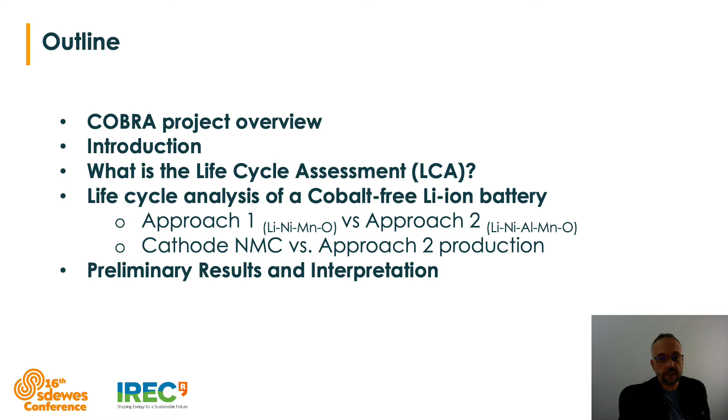Cobra is a European project whose objective is to develop a novel cobalt-free lithium-ion battery technology in order to overcome many of the challenges faced by electrical vehicle batteries, enhancing each component in the battery system in a holistic manner.

Basically, the chemistry of this battery consists of a lithium nickel manganese oxide cathode in combination with a composite anode based on nanometer silicon and graphite as active particles.

This project is financed by the European Commission under the program Horizon 2020. The project started last year and it is expected to finish in 2023. Basically, the scope of the project is to develop the battery pack in order to be validated on automotive electrical vehicle testing.

This is the consortium of the project. As you can see here, we have several companies: industrial engineering and research technology organizations, academic sector, and battery manufacturers. All of this consortium is involved across different European countries.

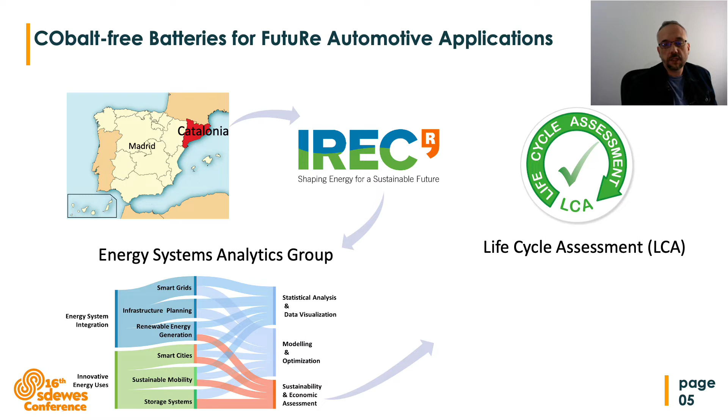From IREC, in particular from the Energy System Analytics Group, we are involved in the project in order to calculate the environmental impacts related to the solutions of the project, using the life cycle assessment methodology to provide guidelines for eco-design aligned with circular economy strategies.

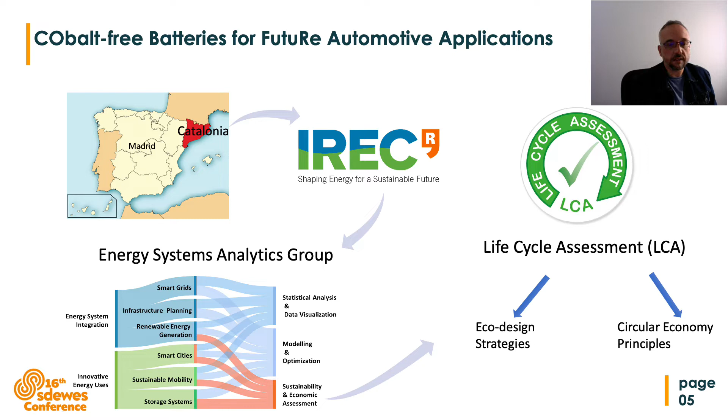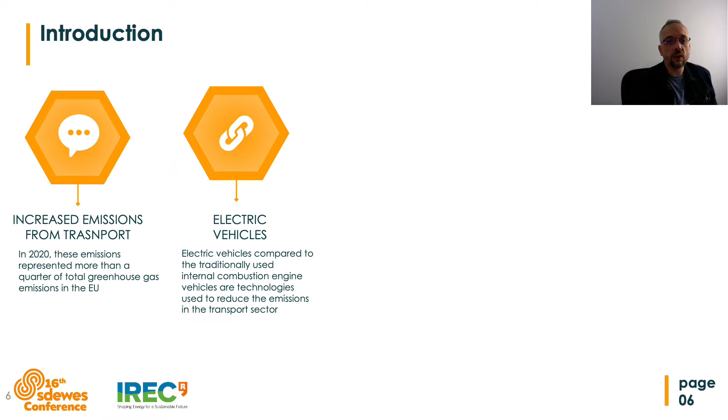Well, as you know, the transportation sector has increased their emissions, and in 2020 these emissions represented more than a quarter of the total greenhouse gas emissions in the European Union. This is why electric vehicles are the main technology in the transportation sector in order to reduce these emissions.

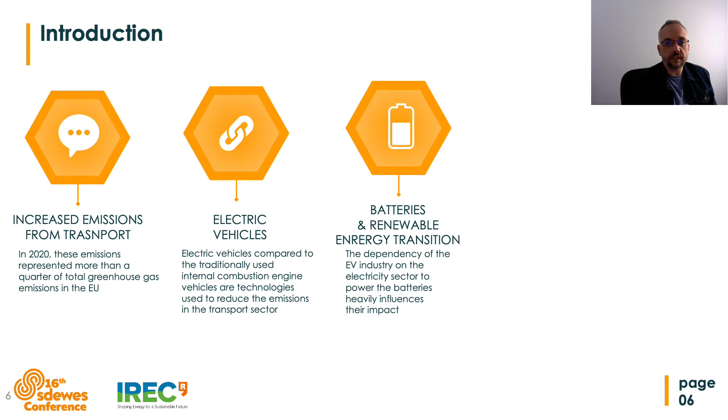The batteries are the main core of this technology, and these batteries have an important role in the renewable energy transition.

The lithium-ion battery technology implies using different raw materials such as lithium, cobalt, nickel, manganese, and graphite, most of which are categorized as critical materials. These materials can bring environmental impact throughout the battery supply chain.

This is why it is very important to address the entire life cycle in order to be able to assess the sustainability of the electrical vehicles.

Regarding our findings in the literature and studies, we can see that lithium, manganese, nickel, and natural graphite have moderate reserves to cover the expected 10% share of electric vehicles in the global fleet in the next year. However, these reserves are not enough to cover the expected increase in demand.

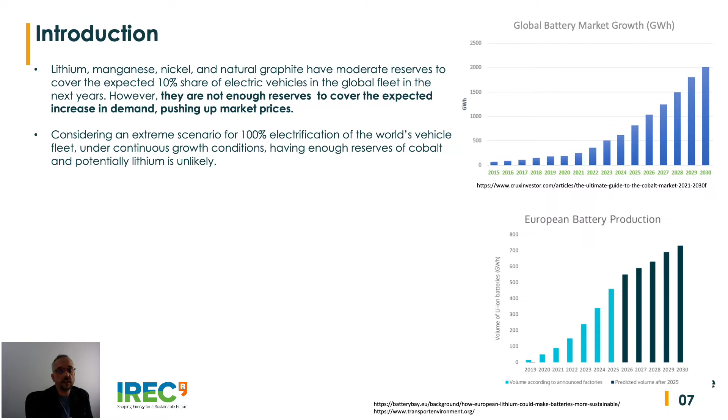On the other hand, if we consider an extreme scenario for 100% electrification of the world's vehicle fleet under continuous growth conditions, having enough reserves of cobalt and potentially lithium is unlikely.

In addition, according to our previous studies and literature, we have found that cobalt and nickel, for example, increase significantly the environmental footprint of lithium-ion batteries.

On the other hand, cobalt is extracted mainly from the Democratic Republic of the Congo, a region historically characterized by political instability and social impacts in the mining sector, involving issues related to child labor, unsafe mining conditions, illegal extractions, and uncountable deaths.

The life cycle assessment methodology allows us to quantify the impact of a product throughout its life cycle, including raw material extraction, manufacturing, use, and end of life.

We can focus the life cycle assessment study on three different scopes, for example, from cradle to grave, cradle to gate, and gate to gate. We can also include an additional scope, which is gate to end of life.

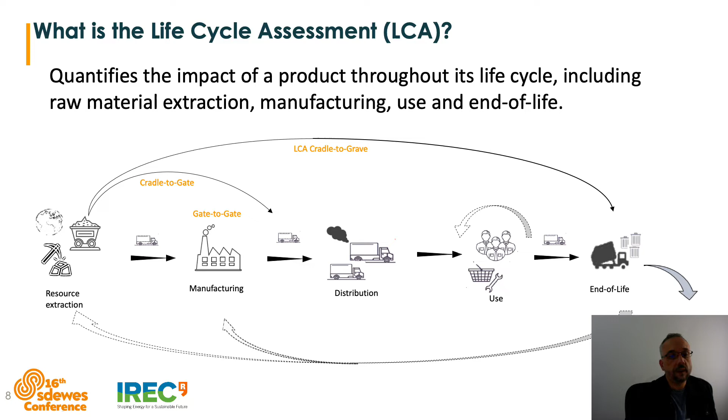This methodology comes from the philosophical concept named life cycle thinking, but it was the standards, the ISO 14040 and 14044, which establish the guidelines in order to calculate the life cycle impact of a product. In these standards, we have 4 phases in order to complete the analysis.

The first step is to define the goal and the scope. Then we have to make the inventory analysis in terms of the materials and energy inputs and outputs. And then we have to convert this inventory into environmental impacts using different methods and different environmental metrics in order to obtain the results, which we will use for the interpretation in the last stage of this methodology.

These stages are very iterative between them. We come back to other stages depending on the redefining of the goal or the scope, or maybe we have to detect some improvement in the inventory, or maybe it is necessary to update the databases in the impact assessments. But at the end, we need to have the final results in order to provide the conclusions and recommendations.

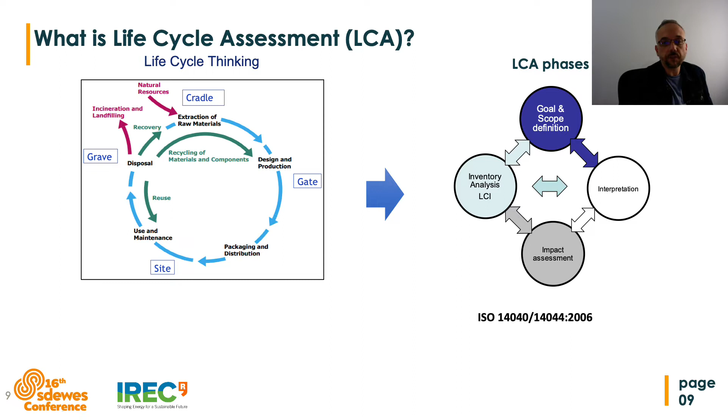This methodology allows us to inform decisions and policies in order to reduce the life cycle impact of the product. And this methodology can support product development and improvement in a company, to make strategic planning, collaborate with public policy making, marketing, benchmarking, and this methodology is used in order to report eco labels and product declarations.

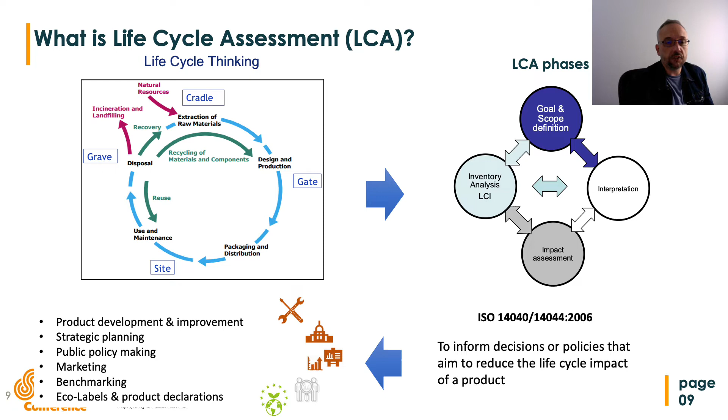We'll start with this explanation of the study. The goal and scope was defined as to explore the environmental impacts related to the production of cobalt-free lithium-ion pouch cells in its early research stage. This preliminary study will be useful to develop the battery pack in the future for the vehicle.

The study is focused on two cathode approaches, as mentioned before. Approach 1 is based on the lithium nickel manganese oxide, and approach 2 is based on the aluminum doped oxide, similar to approach 1, but the powder is doped with aluminum.

This is the system boundaries, and you can see in this slide we have made the study from the raw material extractions and the component production, including the cathode, anode, electrolyte, and separator, and the cell production. The other stages belonging to the life cycle of the battery were not included in this study, and the functional unit is defined as one pouch cell produced.

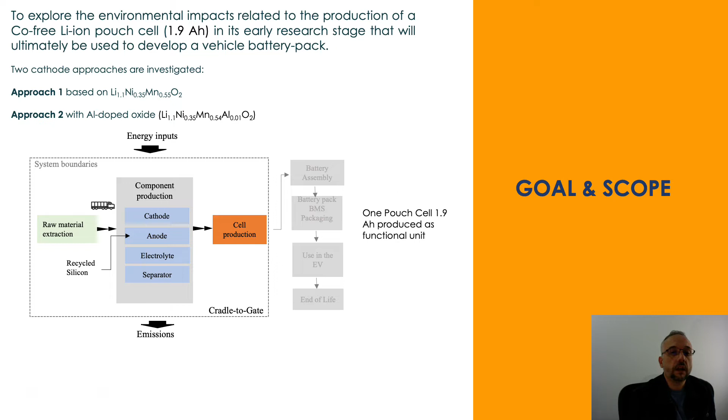On the other hand, as mentioned before, we made a preliminary study about the comparison between the commercial nickel manganese cobalt cathode compared to cathode approach 2. For this specific study, we have defined the functional unit as 1 kilogram of powder.

You can see in this slide the life cycle inventory. In this table, we can find the different materials used to produce the cathode, the anode, the electrolyte, and separator. Basically, the difference between approach 1 and approach 2 was the binder used. In approach 1, the binder used was sodium alginate, using water as solvent.

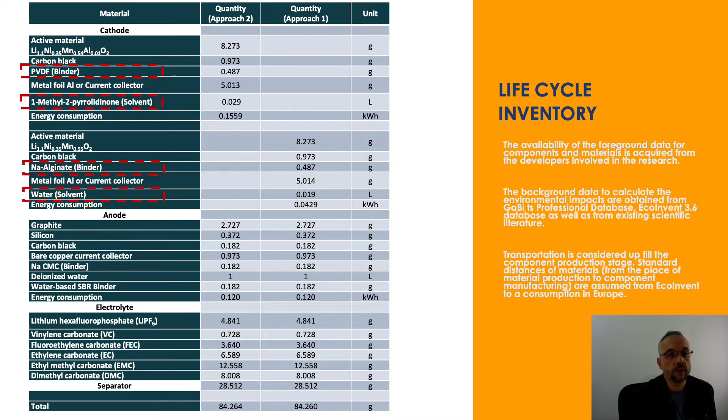For approach 2, the binder is composed of polyvinylidene fluoride, and the solvent used in approach 2 is constituted by methyl pyrrolidinone. These are the main differences between these approaches.

I have to say that the availability of the foreground data for components and materials was obtained from the developers involved in this research. On the other hand, the background data used to calculate the environmental impacts were obtained from GaBi datasets and EcoInvent datasets, as well as from existing scientific literature.

We have included in the model the transportation from the material extraction to the manufacturing, using the standard distance taken from the EcoInvent modeling.

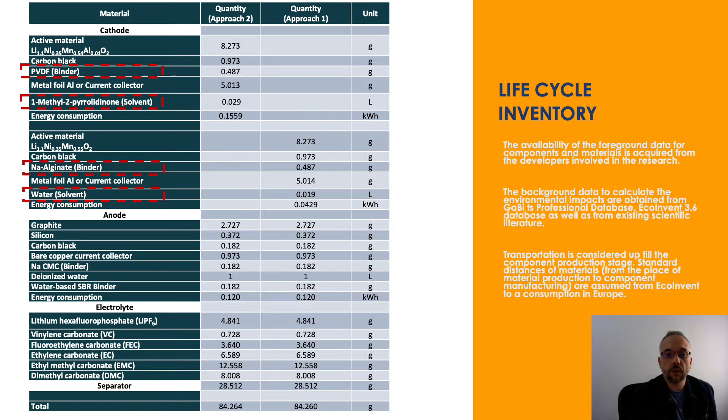So we use the software GaBi in order to calculate these metrics, and the methods used in the environmental impact assessment were the CML method and primary energy demand from renewable and non-renewable sources.

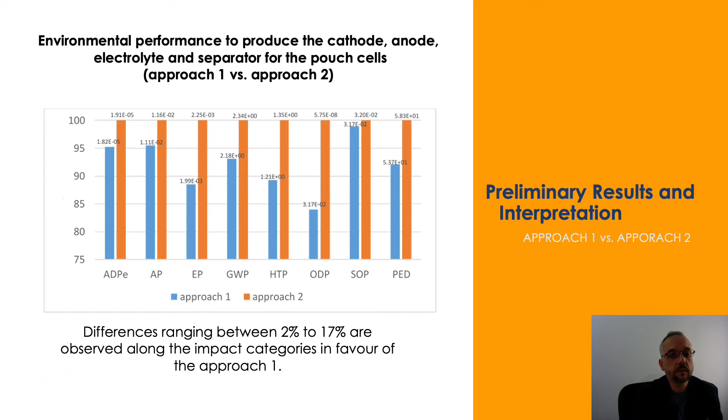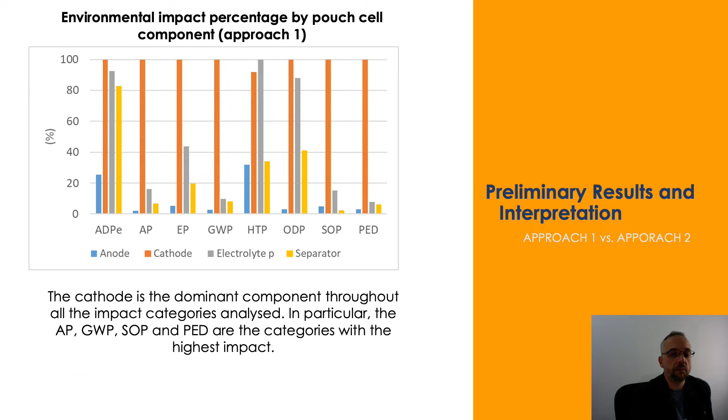If we explore the environmental impact by component, we can see that the cathode is the dominant component throughout the impact categories analysis, as shown in this picture. For example, we can see the acidification potential has a high environmental impact for the cathode. Or for the global warming potential, the cathode also has a high environmental impact, similar for the primary energy demand.

On the other hand, we have the PVDF binder used in approach 2, which has an important contribution of between 12 and 25%, mainly in the ADP elements category, or abiotic depletion potential elements category, in eutrophication potential and human toxicity potential.

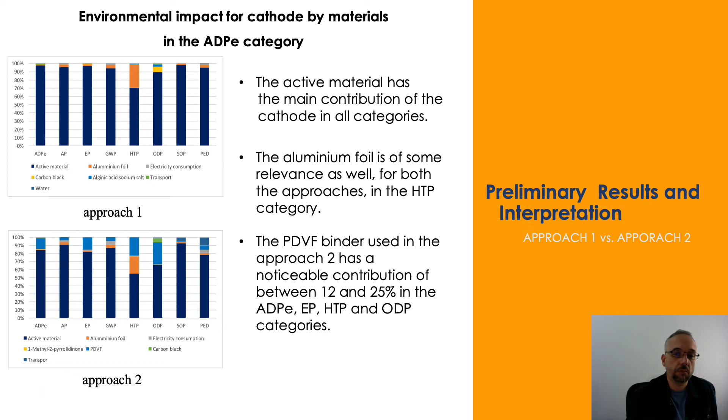If we focus on the abiotic depletion potential elements, we can see that the active material and PVDF binder are the main materials responsible for the higher impact in the cathode approach. It's important to remark that the active material in approach 1 showed a slightly higher contribution, around 0.5%. So the conclusion here is that the binder is responsible for this higher environmental impact in approach 2 compared to approach 1 in this ADP elements category.

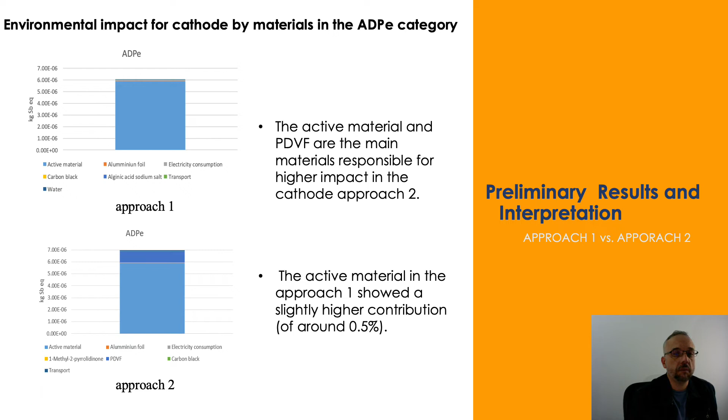If we look at the distribution by materials in the active material production, we can see in this chart that the lithium nitrate and the EDTA are dominant in the abiotic depletion potential elements category, together contributing a little more than 50%. On the other hand, we have the manganese nitrate exhibiting a contribution of roughly 14% for the same category.

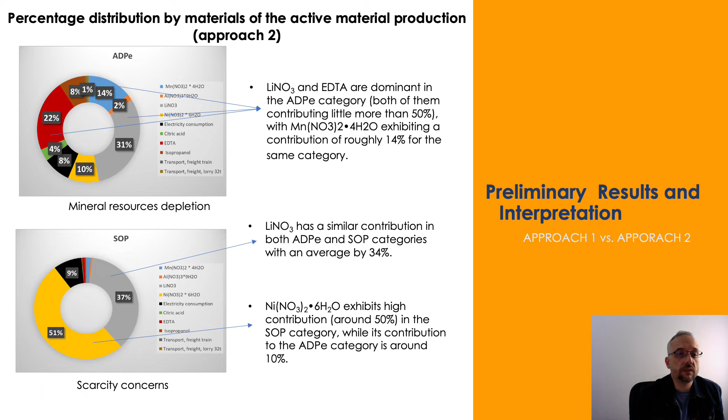This is for the abiotic depletion potential elements category, but in the other environmental category related to resource depletion, the surplus ore potential, lithium nitrate has a similar contribution for both categories. However, nickel nitrate has a higher contribution, around 50%, in the surplus ore potential category, while its contribution in ADP elements is around 10%.

Looking at these two categories related to energy consumption, we can see that both the global warming potential and primary energy demand have important contributions, around 85%. This is contributed largely by the non-renewable resource flows in the PED category, due to the electricity needs assumed in this study.

As mentioned before, the electricity mix used in the LCA study is for the European region, and we can see, for example, for the primary energy demand, the non-renewable resource flows contribute largely to this category, because we have important contributions from lignite, fossil fuels, hard coal, natural gas, and uranium in nuclear energy sources. On the other hand, we have fossil fuels representing around 40% of the electricity mix, contributing largely within the global warming potential category.

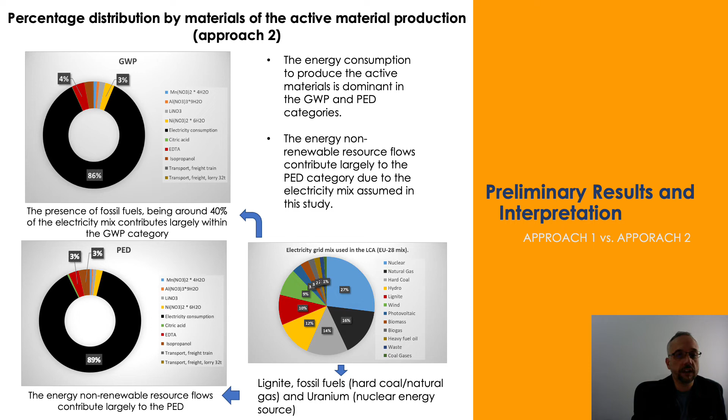For the study of the comparison between the commercial nickel manganese cobalt and approach 2, we can see for these specific environmental categories that the global warming potential and primary energy demand are the categories reflecting the highest impact for approach 2, compared to the nickel manganese cobalt cathode. It can be attributed to the high energy consumed to produce the active material for approach 2.

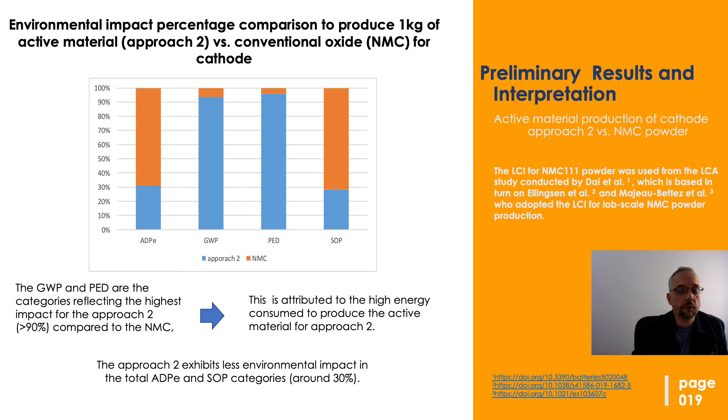Approach 2 shows less environmental impact in the total abiotic depletion potential elements, and the surplus ore potential categories are around 30%.

It is important to remark that the small batches will exhibit higher energy consumption per kilogram of powder, so many steps in powder production happen per batch rather than per kilogram. This implies that energy consumption will go down when the size of the batch is increased, or when the batch production takes place on commercial or industrial scale.

On the other hand, the energy consumption also depends on the calcination temperature of the material.

In this graph, we can see for the category of surplus ore potential that the active material approach 2 has lower environmental impact when compared with the nickel manganese cobalt powder. This is attributed to the higher impact of the hydroxide nickel manganese cobalt as subcomponent to produce this cathode. It is around 87% of the total impact of the nickel manganese cobalt.

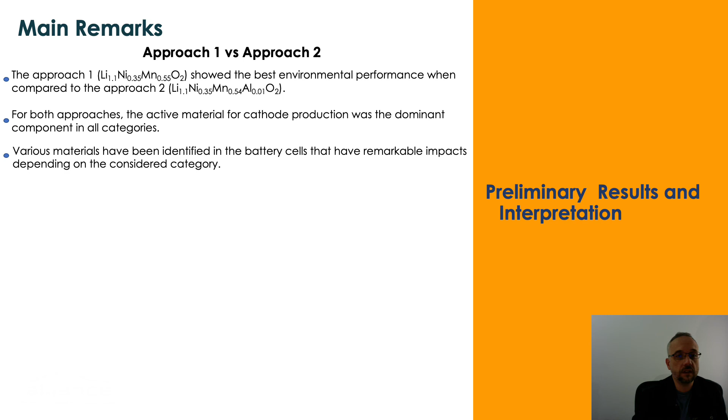In addition, we have detected that several materials identified in the battery cell have remarkable impacts depending on the considered category. The energy consumption to produce the active material is dominant when focusing on the global warming potential and primary energy demand categories, which is due to the presence of energy resources in the electricity mix of the European region.

For the approach comparison with the commercial nickel manganese cobalt powder production, we found that active material approach 2 has lower environmental impact in the surplus ore potential indicator when compared to the nickel manganese cobalt powder in the same metric. This is attributed mainly to the absence of cobalt.

And regarding the global warming potential and primary energy demand, which are related to energy consumption, these categories reflect the highest impact for approach 2 compared to nickel manganese cobalt. This is attributed to the high energy consumed to produce the active material for this approach.

Finally, we can say that we have more work to do in the development of this kind of lithium-ion battery, and for that reason this LCA study only provides a preliminary basis at the early design stage in order to try to obtain mature cobalt-free batteries. Therefore, extending the life cycle study is very important in the future, considering the cradle to grave perspective, in order to know the big picture of the life cycle stages for this new solution.